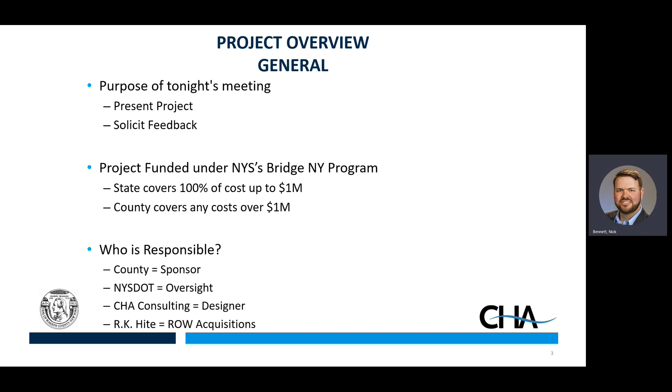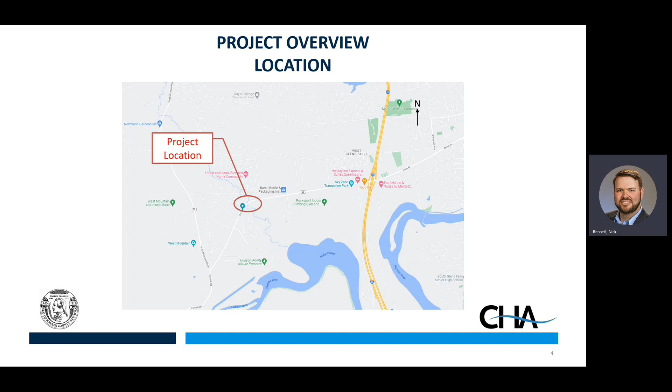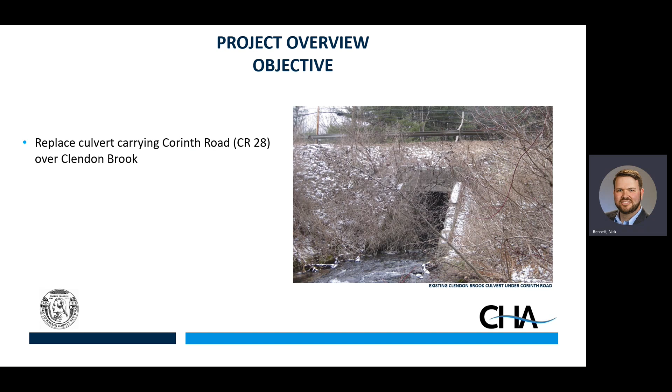We will need to close the road and do a detour, and we'll show you that in a moment. The project development process, regardless of the complexity of the project, when we...

do get state funds in this case, and sometimes federal funds, in other cases we do have a process we have to go through. There are 4 stages: scoping, preliminary engineering, detailed design, and construction.

I'll go through those real quick. We are complete, we finished scoping, and that's why we're here with you tonight to start the next phase. But the first phase was scoping.

We did survey and mapping, environmental screenings out there. There are some wetlands we have to deal with, some permitting we'll have to do to mitigate the wetland impacts. We did traffic, operational, and accident analysis in the corridor area, and developed the preliminary alternatives that you'll see at the boards when you go up to those.

Having done that, the next stage is preliminary engineering. Tonight's public informational meeting is one of the first steps of that process to get your input. After your input is collected, and we look at it and take all the comments and present those to the county, a preferred alternative is selected.

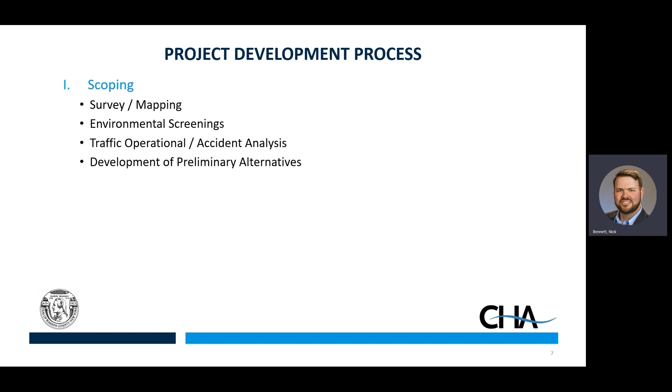Then we complete a design report. It's a document that documents all of the activities we took environmentally, what the potential cost of the project is, what we decided to build after we went through this process, and we obtain design approval. The county and the state get together and say, yes, this is what's being built. We all agree, let's move to the next phase.

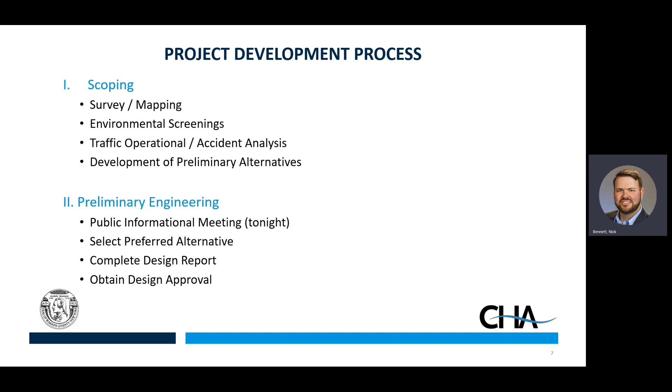And the next phase is detailed design. In that phase is where we actually develop the detailed plans of the actual culvert replacement, the roadway that approaches the culvert, the guide rail, and so on, the drainage changes that will be made, all improvements that will help this roadway in the future. So we develop those plans.

In that same phase, we do the right-of-way acquisitions that are necessary, and that's where R.K. Hite and Jim Deloria do their work and work with the property owners and get the fair market value for the property that's needed, make those offers to the property owners, and work through that process.

We also want to make sure we have utility agreements. Those are required. Any utilities we do impact, whether private or public, due to the replacement of the culvert, we have to coordinate with them. In this case, we've already done some of that coordination with some of the overhead utility poles. There's also a local water line that has to be temporarily moved and then put back in place where it is today.

And then we advertise the project for a contractor, get bids in, look at those bids, analyze them, and then ultimately award the project for construction, which is the 4th phase. During construction, the county is still involved. They hire an inspector who represents their interests and watches over the contractor as the project is built.

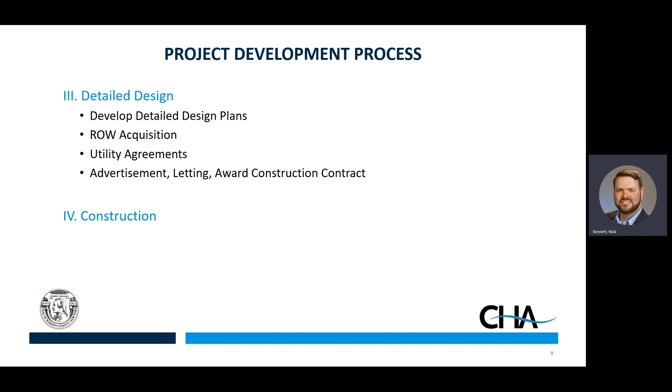These 4 phases: project scoping is complete. This preliminary engineering phase, which tonight is a part of, and our future studies will take us through the holiday season into the spring. Next spring to the fall of '23 will be the detailed design, and potentially start construction - but I'd rather be conservative and say construction would be spring of '24. If things go smoothly, it could be earlier, but because of the right-of-way acquisitions involved, I like to be more conservative and say it's going to be spring '24 at this point. We'll update if that were to change in any way.

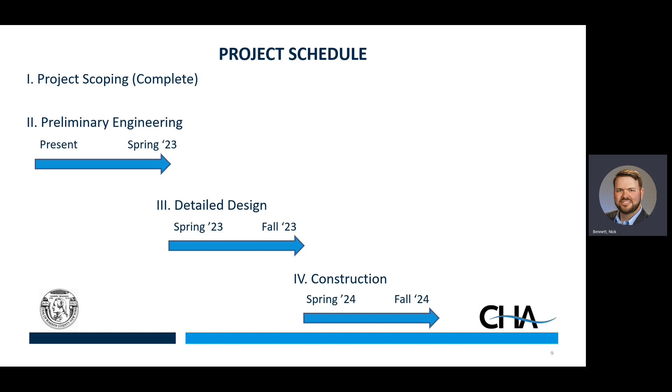I'll bring up Nick now, and Nick's going to talk about some of the design considerations of the culvert. So, evening.

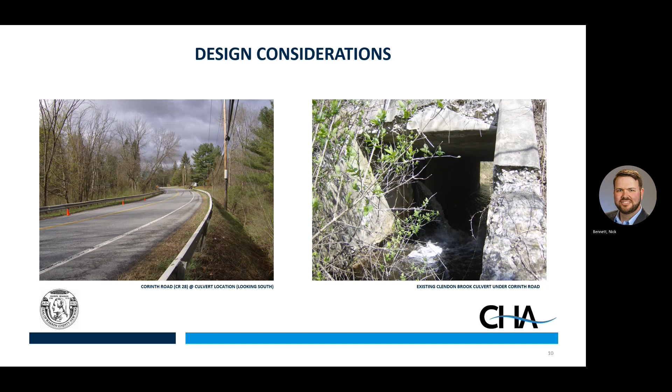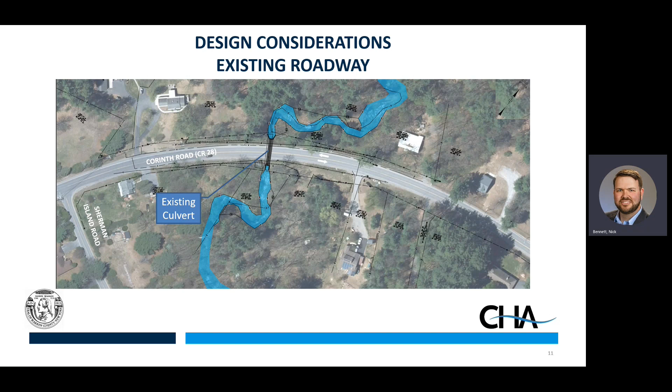We're going to be extending the culvert out a bit, making it longer than it is now to increase the layback of those slopes, because right now they're very steep and we want to make it more stable for the future. We're also going to be making the culvert bigger, which I'll show in a minute, and that will meet all the state and federal requirements for hydraulic flow and environmental guidelines for aquatic passage, terrestrial animal passage, and other environmental factors.

We're also going to be extending some guardrail out here, shown as this black line with the circles. We'll bring that up to current spec and make sure the roadway is well protected.

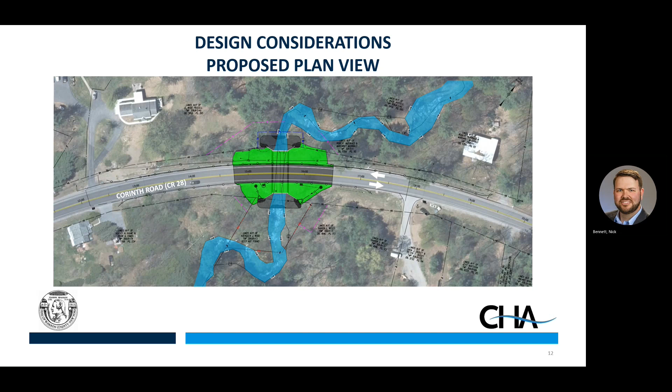The culvert will be installed level, and in accordance with environmental guidelines and requirements, it will have a natural stream bottom. That's natural material that's excavated, put to the side, and then put back inside the culvert as it's built to maintain a more natural stream setting. It will obviously be pitched slightly to convey the water flow.

Most of the elements of the culvert are going to be precast concrete. If you're familiar with that, it's designed and built in a fabrication yard, where they do all the pouring and forming inside, so the quality control is very good. They bring it out and put it together like Legos or an erector set, which also speeds up the construction timeline because you don't have to wait for all that concrete to set up before you can backfill and reopen the roadway.

Not much is changing on the top. People driving it, I don't think you'll really notice the difference other than the pavement and guide rail will be new, and there'll be some drainage improvements, as Joe mentioned.

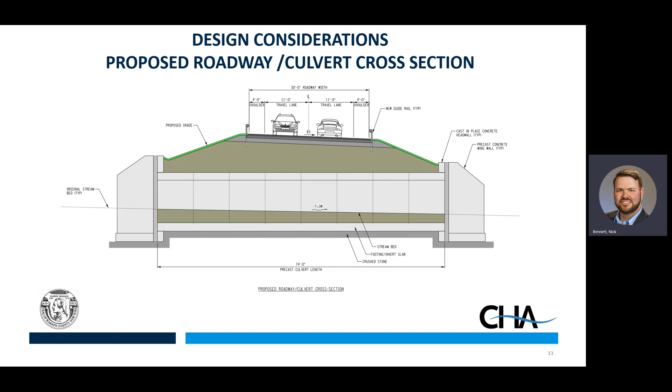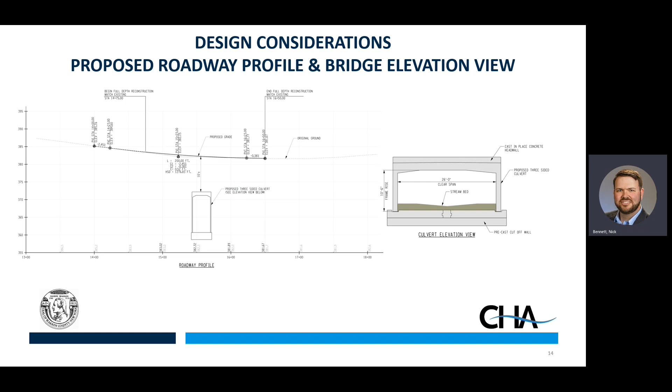And then you'll see an elevation view of the actual culvert. Right now, we're intending it to be 26 feet wide and about 10.5 feet high to accommodate all the requirements.

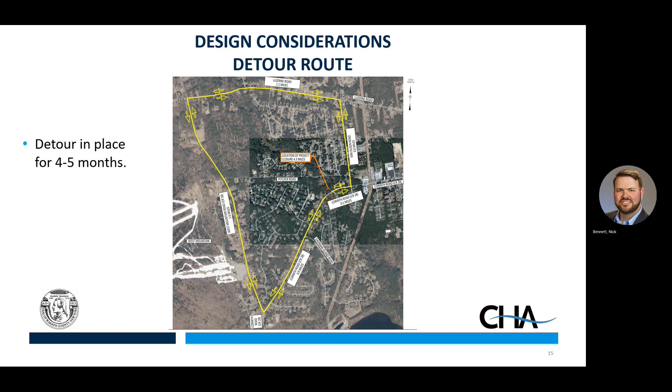So that's basically it. At this time, if you have any general questions, Joe's going to come back up, and we have a website and email for you if you have questions after the fact.